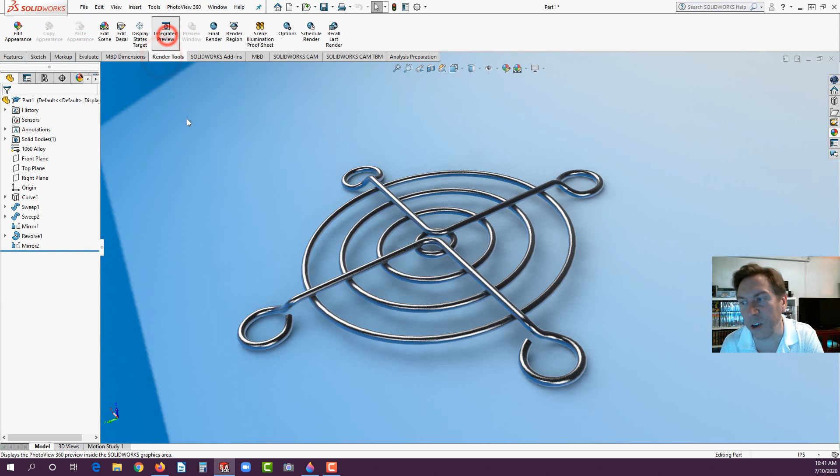Let's go ahead and get started. All right, now you can see with this model, you just turn off integrated preview here. But our strategy, and by the way, this is the rollback bar on the model tree here, I'm going to just drag this up. We're going to start off with developing the 3D curve from 2 sketches. And actually, I have perspective on, so let me turn off perspective. And let's go to front.

We're going to start by drawing the front profile that you see here, and then we're going to draw the right profile. That's going to be on the right plane that you see there, which has the bend on it. It's almost like it's the tool that you would bend the wire on to form it that we're developing. With just sketches, we don't have to make a solid or a surface or anything like that.

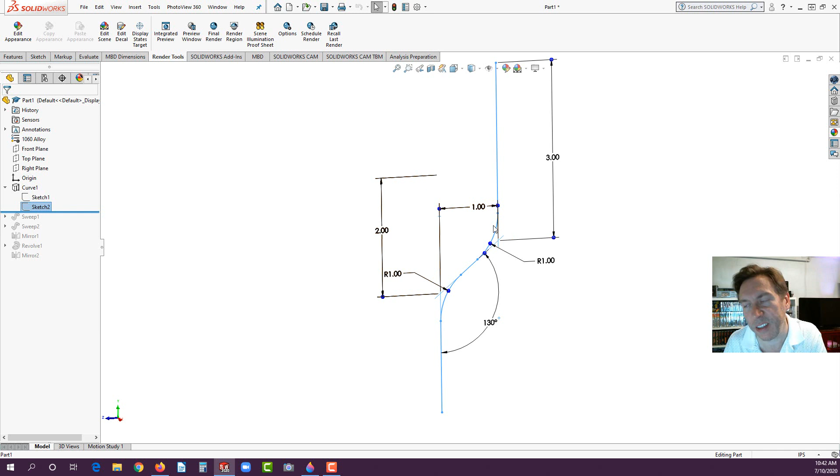And then we're going to use the curve tool to combine those to make that 3D curve that we'll use later for a sweep. You'll see we'll sweep that along, and then we'll end up with this. As you can see, the sketch contained in here is just a circle, and then it's swept along the actual guide curve that's internally there. You see that in orange right there.

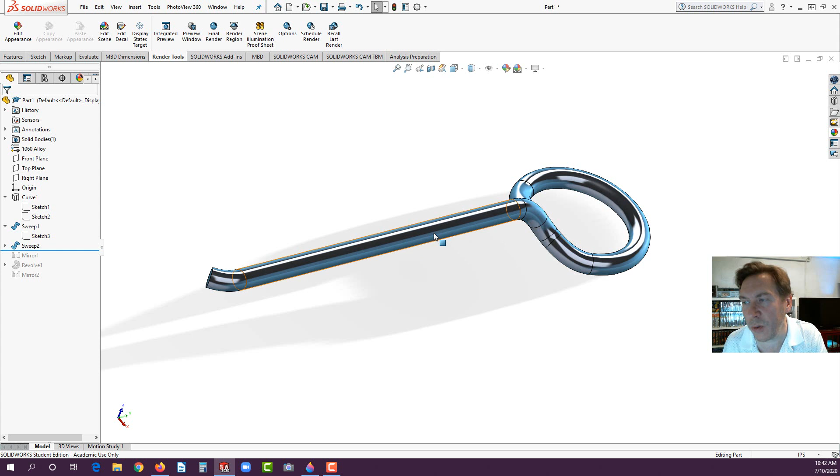Now the next sweep we're going to do is to extend it out. Some students have asked, why didn't you just do that all in one shot? We could have, but I like how we build it in a very small chunk that's more digestible. If you want, you could build this all in one shot, yes. But what we do is we extend that out, and then this sketch for this sweep is a little basic. It's 7 inches, and then we have this 45-degree hook. The reason for that, we're going to mirror it across, so 45 and 45 makes 90. So you end up with an elbow, 90 degrees, and it mirrored over the little wire on the other side there.

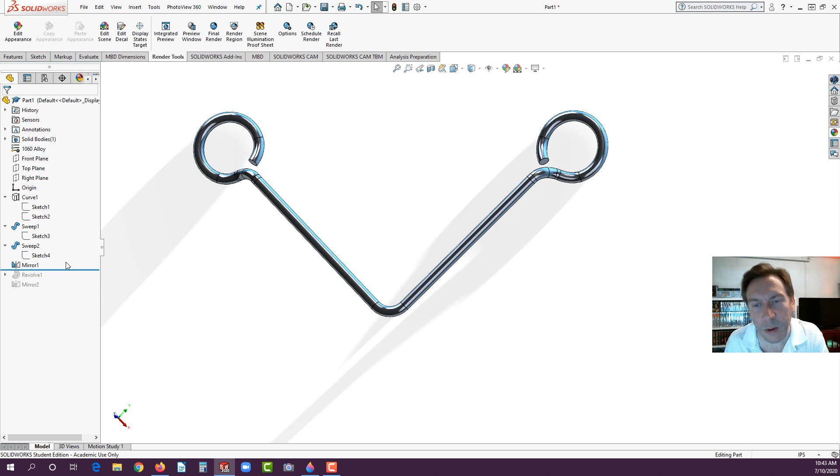Then we're going to use a revolve tool, and we're going to revolve this. Now, a lot of students that I used to have do this would revolve a full 360, and then they would go ahead and make a circular pattern. Rather than doing that, the strategy I used here, get rid of the pattern. You don't even need it.

What you do is you just revolve 135 degrees on one side and 45 degrees on the other, because right here is where the sketch is going to be contained for that. Here's the sketch with the multiple circles that are going to be revolved around the center right here. So 135 and 45 makes 180 degrees, which gives you exactly half. And then you just mirror it across, using one of those little flat ends of the revolve to mirror that. So that's the strategy we're going to look at today.

There's a dozen ways you could do this, this is just one method. So let's begin, start off with a new part file.

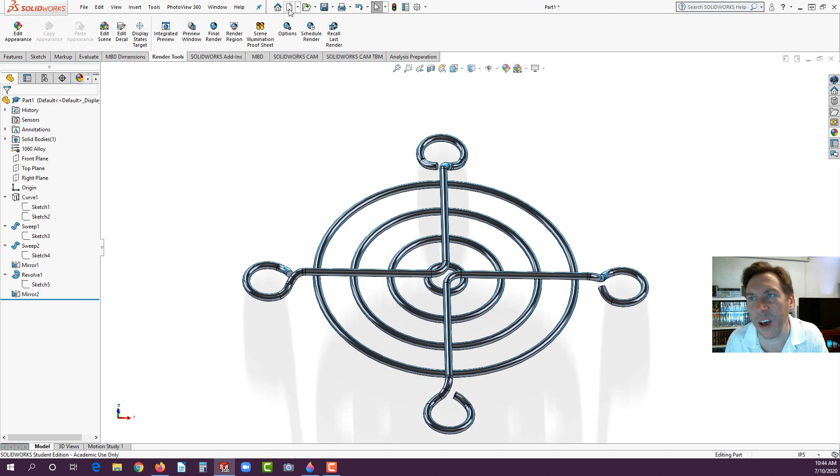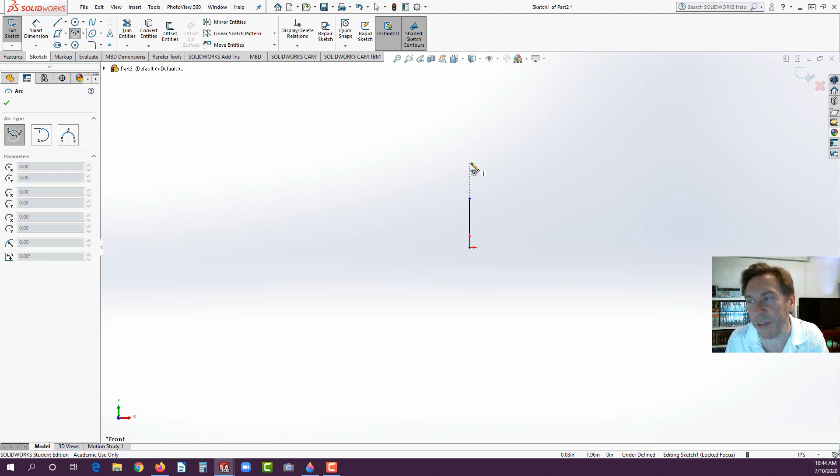Select the front plane, start a sketch, and go to the line tool, and right at the origin, drag up a vertical line about 1 inch. Then go over here to the center point arc tool. Hover above your line so you get the line of inference, maybe about a half or three quarters of an inch above it. You don't really have to measure it, we'll put dimensions in a moment.

Click, release the mouse button, and connect directly to the vertex of the line that you just drew a moment ago. Click again, rotate it counterclockwise around, and then get over to this side, and it should be about 300 to 330, around there. Again, we're just getting it close. Click and hit escape. Now what we need to do is align that center.

You could do that with drawing a center line from this point to this point, or we could use a relationship, and that's what I'm going to choose to do. So I'm going to hit the F key first to zoom up so you can see this. Now make sure you hit escape a couple times. Hold down the control key, don't let it go. Select this line, and then select the center point. Over on the left, you should see coincident.

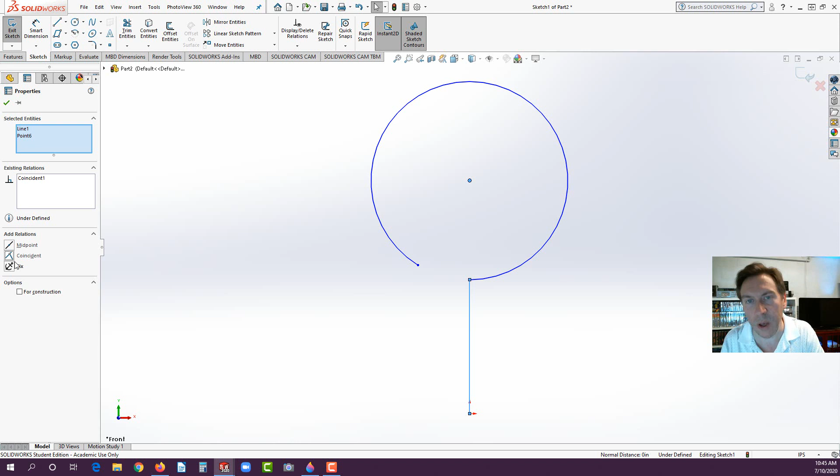Now, some people are thinking, well, shouldn't it be vertical? If we selected the endpoint, or the vertex down below, then yeah, but coincident looks at that line as if it's infinite, and it's just aligning itself to it. So we now have applied that relationship, so it can't sway left or right.

Now we could go to Smart Dimension, click on the bottom origin, and click on the center point of the arc, drag it to the right, click. This is going to be 4 inches. Click on this arc here, drag it up to the upper right, 1.5 inches.

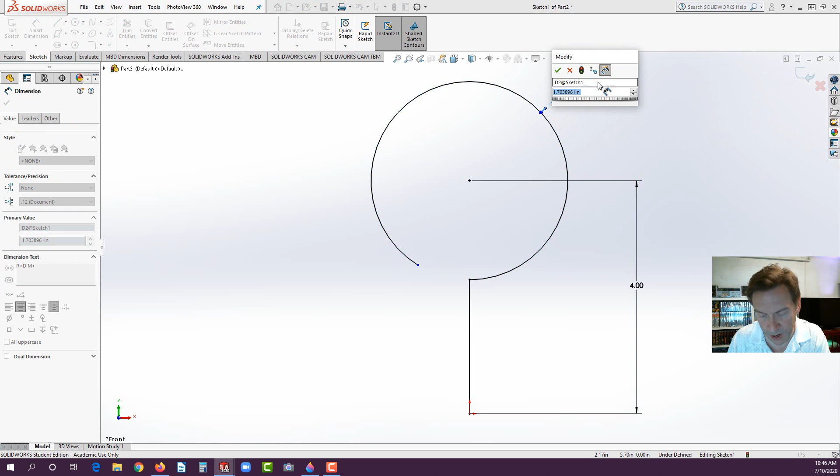Here's a little trick, those of you in class, if you remember this I'll be really impressed. We want to put in an angle for the opening here. The trick is 3 points, the only 3 points there: 1, 2, and then the center point. Click, that's 3. Drag it between the opening, click to release it, and type in 15 degrees.

So that's one method. Interesting, another method popped up that someone knew of, holding a key, I can't remember, but last time I did this lesson and posted it, someone said there's another method too. There's a very old way where you actually drew center lines and just dimension the center line. You could do that too, and a lot of my students find that actually easier sometimes than remembering these 3 points.

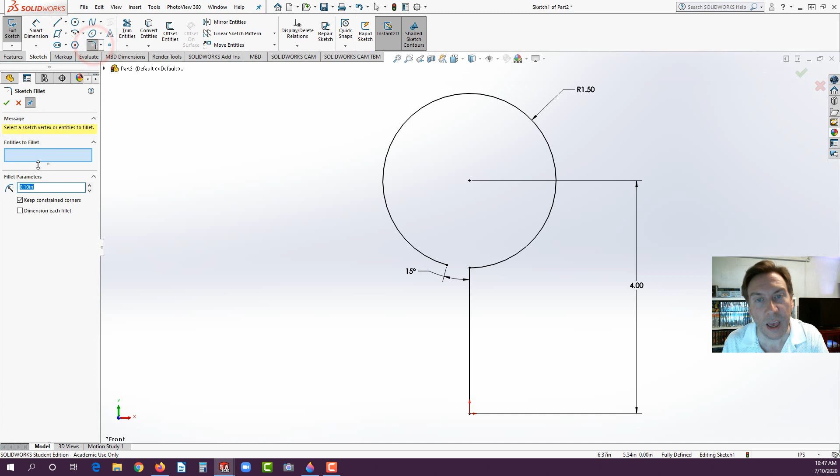Now that we have that, we need to put a bend in here at this corner. So go to sketch fillet, set this to 1 inch, and select this corner right here. Hit the green check, and there's the bend. All right, that's done. Hit rebuild or exit sketch, either one is fine, gets you out of it. It should turn gray, the dimensions disappear if you click on the screen, and you're in good shape.

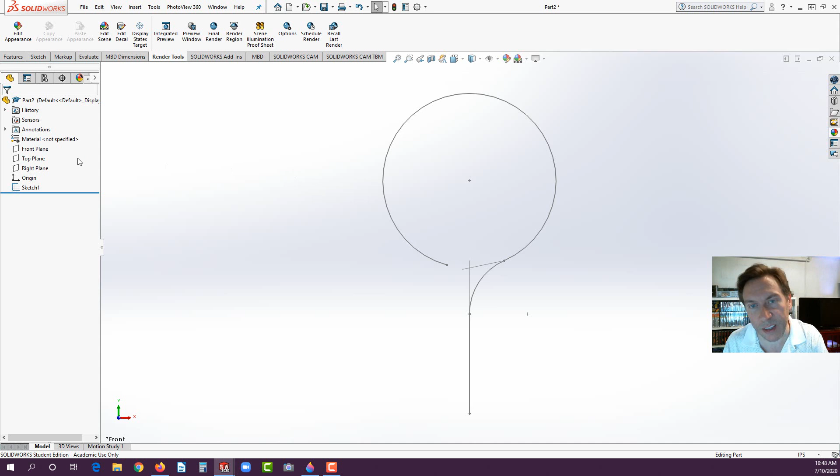Now we need to create a separate sketch that's perpendicular on the right plane for the bend that's going to take place. So select the right plane, start a sketch. You'll have to hit the space bar or use fast keys like Control 4 to go to the right view orientation. Take your line tool, get down at the bottom, click when you get the origin, the little orange circle, drag this up about 1.25 inches, almost 1.5 inches, make sure it's vertical, click. Drag off to the right a 1-inch line at around a 45-degree angle, click. Now drag a line straight up and try to match the line to the left of it so it's about the same height, click.

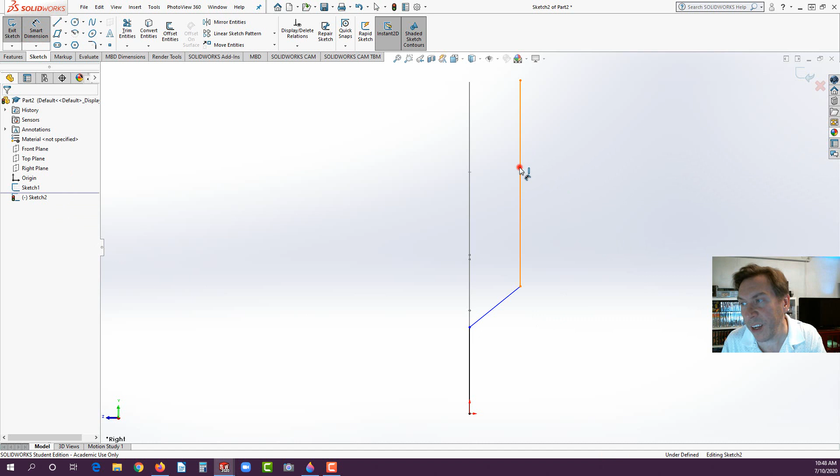Then hit escape. Let's go to Smart Dimension, dimension this line right here, click over here, and that's going to be 3. Now what we're going to do is that's eventually going to have a bend in it, and we might want to dimension this on a print. So it's a good idea to say, eventually this is going to be a theoretical sharp corner once the bend or fillet is put in.

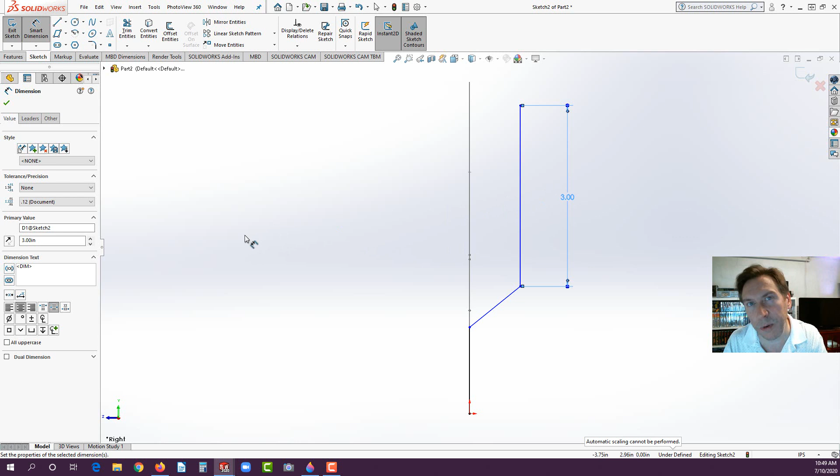And so that dimension, you want someone to be able to understand what it is. So over here on the left, where we have dim text or dimension text, click underneath there, hit enter, and type TSC, theoretical sharp corner. That's preemptive, so click on that.

All right, now let's go ahead and make sure Smart Dimension is on. Click on this angled line and then click on this vertical line on the left and get in between. That's going to be 130 degrees. Now click on this line here and drag it straight up. It's weird, the dimension doesn't center it on this one, so that's okay, and I know I've been touting, make sure your dimension centers. Once you put it in, it will. So go ahead and click right about there. That needs to be 1 inch.

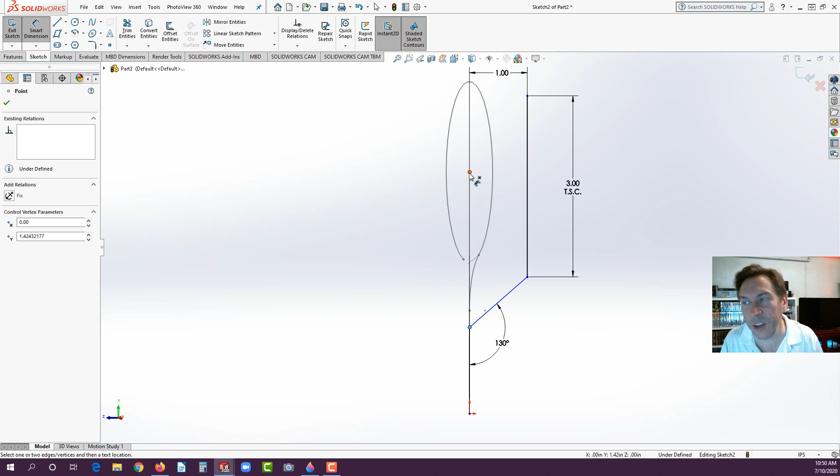You could drag that up like so. All right, there's one more dimension, and this one's the toughest one. The trick is click on this corner down below here, and now hit your left arrow key on your keyboard just one time, and you'll see now you're seeing the actual front view sketch, and you're just dimensioning to the center point of that. So click on that, drag it over here, center it, click, type in 2, and then over here again, hit enter TSC.

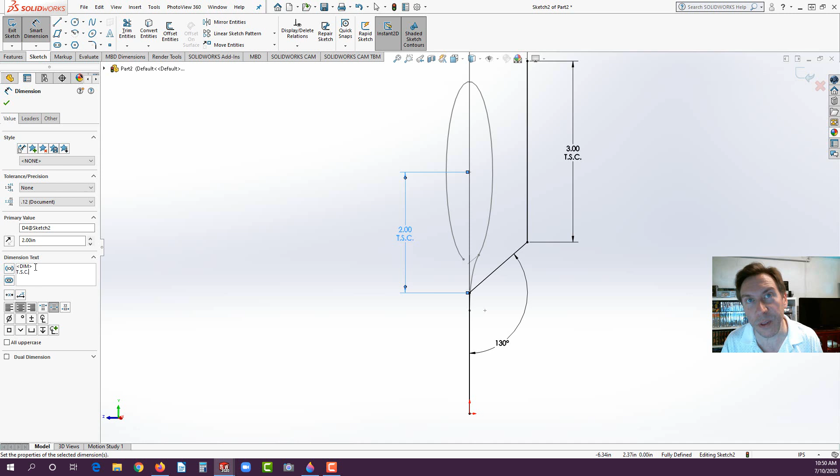Now, not all companies require you to do that. Where I came from, we used to have to do that just so someone would know. There are other methods too. I don't think that's an ANSI standard by any stretch of the imagination, but where I used to work, they wanted us to do it that way. So if you're not required to do it, don't worry about it.

All right, now we have those, we have our bent wire. Now we need to put the radiuses or fillets in it. So go to Sketch Fillet, and it should keep it at 1 inch. You could go ahead and select this one right here and this corner here and hit the green check. Now you'll notice since they were done at the same time, there's only one, and you should note that on the drawing so that someone knows that both are 1 inch.

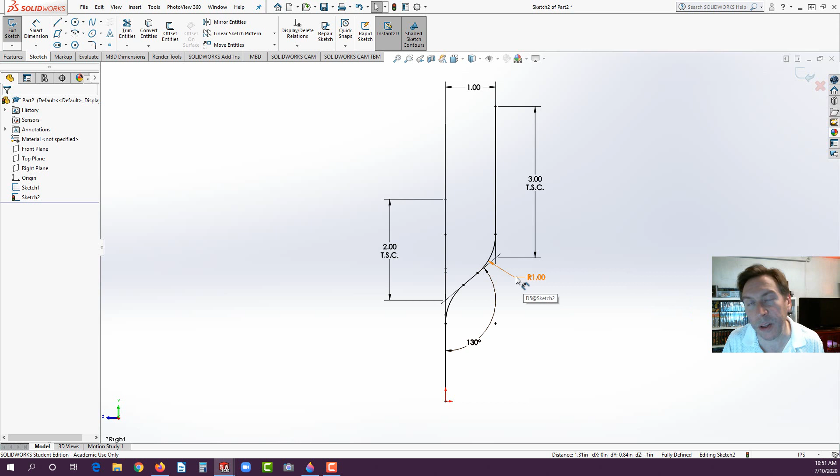Hit the green check mark there. Now click on, not on the actual number, but click on the extension line of the radius. Over to the left here, hit the little arrow to the right.

Now, the ANSI standard, you could put 2x or x2 for times 2. I like putting in 2 PLCS period for places. Where I used to work, we used to do it that way, but that is not an ANSI standard.

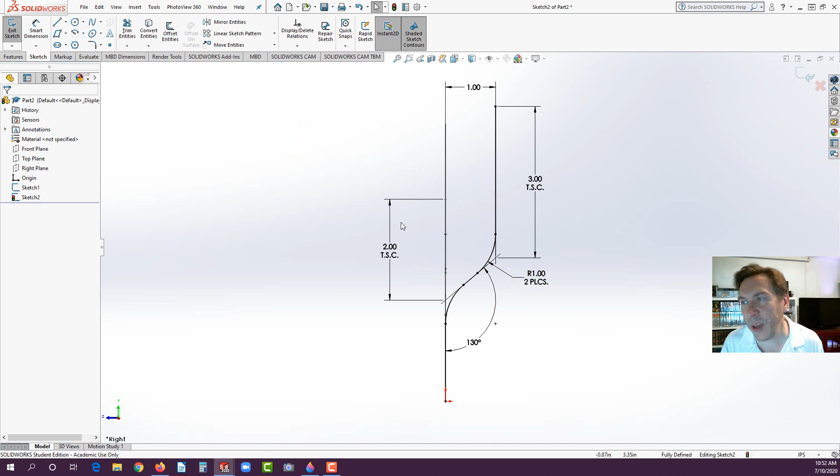Now that we have that done, go ahead and hit rebuild or exit sketch. Either one's fine. And if you rotate this around, you can see both sketches laying on top of each other.

Now we could go to insert at the top, go to curve. By the way, if you don't see insert, it's just because you don't have this tacked in. You have to hit this little arrow here, then insert and curve. But I'm going to tack mine in. I like to have that.

Insert, curve, projected. Notice you have sketch on the face or sketch on the sketch. That's one of the really neat things SolidWorks has. In some systems, you actually have to extrude the surface or some sort of model and then project it on top. SolidWorks cuts out that middleman. One shot, sketch on sketch.

Go ahead and select geometry from both. You can select this circle here and then maybe this line here, just as long as it's one or the other, or you could select it from the feature tree over here. You'd be able to go in and actually select both sketches. Hit the green check. Now click somewhere and you'll see the guide curve now.

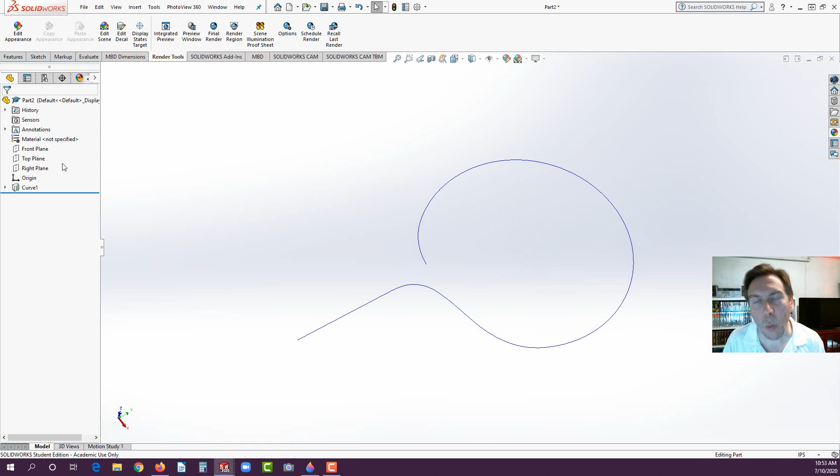All right, we're going to now draw a circle that's going to sweep along there to make this. Let's select the top plane, start a sketch, go to the circle tool, and you might have to rotate this so that you could see clearly the origin. If you're looking at it from a side view, it might be very difficult to lock it in. So rotate or just go to the top view orientation.

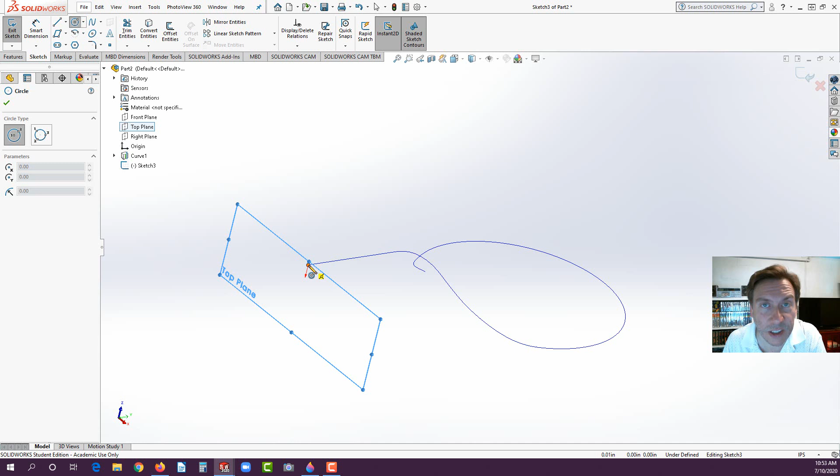Once I get this orange dot, I'm going to click and drag this out. I'm going to go to Smart Dimension, and it's 0.5. Now you're probably thinking, wow, 0.5, that's pretty big. It is. This is a big grill compared to what this is. I didn't want to go and measure all this, so I just scaled it very large with simple dimensions that are easy to remember, so I don't always have to look at the training guide.

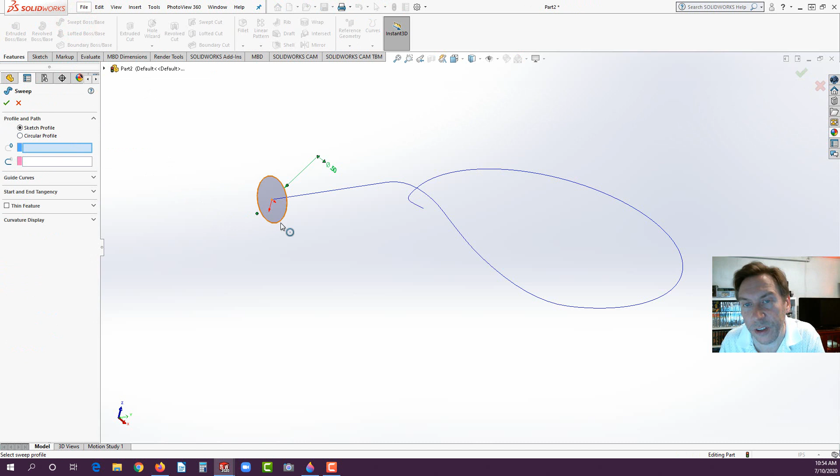Select the circle, and then select the blue guide curve. And you'll see it sweep along, giving you a preview. Hit the green check.

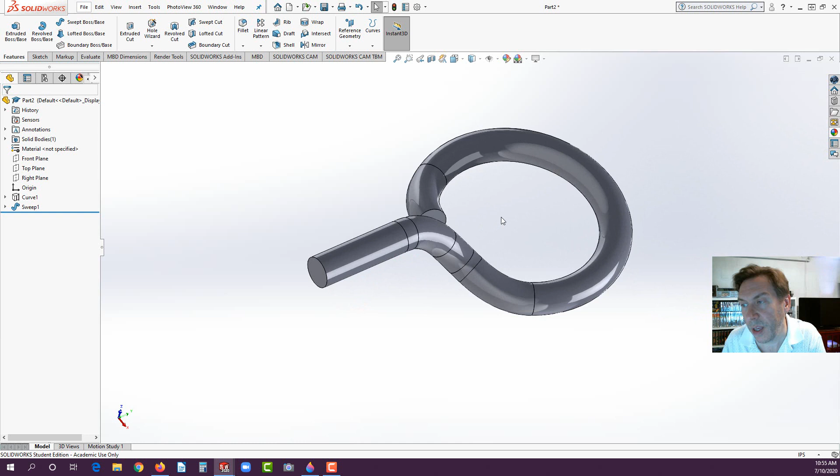Now, for some reason, the curve still stays on. So click on that and click on the little eyeball to hide it. Now, if you accidentally selected the solid model and hit it, you have to go over here, click, and then click on the eyeball to unhide it.

All right, let's go ahead and select the front plane, start a sketch. The hard part is done. Let's go to the front view orientation, go to the line tool, click on here, drag this straight down. It's about 7 inches. Now, here's a little trick I'm going to show you.

You notice with the line chain, you could continue on, but we need a tangent arc that's going to hook only about 45 degrees down, and it's going to be about 1 inch for the radius. Actually, a half inch for the radius. So here's a little trick.

Rather than going all the way up to the top and finding the tangent arc tool, this is kind of neat. And if I were to hire someone and if I saw them do this, I would be applauding, because this is one of those little shortcuts. Might not seem like a lot, but it shows the level of knowledge that a person has of the software. Technical expertise is what employers are looking for.

Now, hover over that point just for a second.

Now, don't click, just drag it down and to the left, and you should get a tangent arc. It automatically started that for you. There's a lot of little tricks like that built into the software. I'm not going to show you every single one of them, there's so many, but that's just one example.

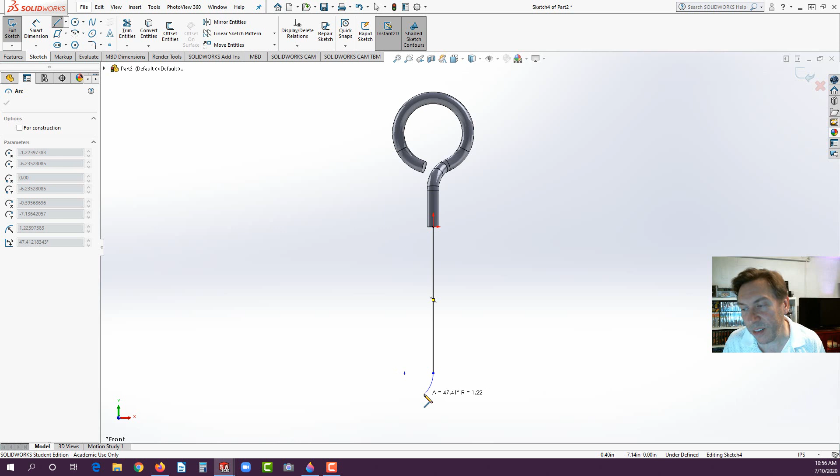Now, A should be equal to about 45-ish, and then the radius, just get it close to 1. That's fine. Click, and make sure it hooks to the left a little bit. Hit Escape. Now let's go to Smart Dimension and dimension that at 1 inch.

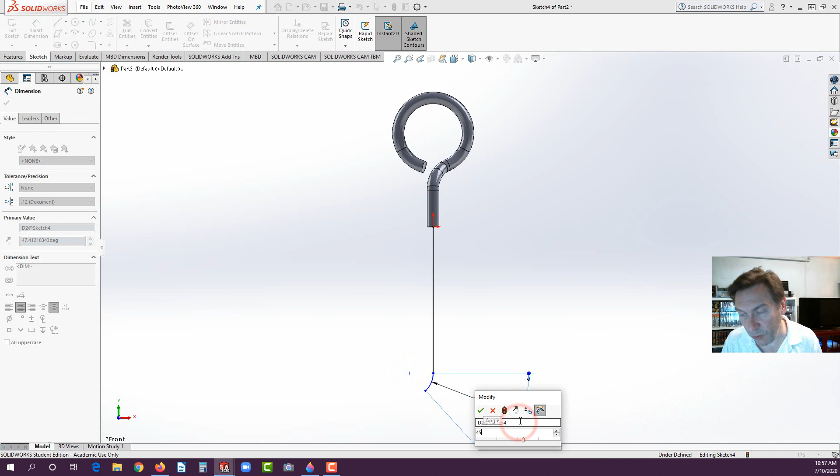Remember the 3-point arc: click 1, 2, and on the center. Drag that to the lower right here. That's going to be 45 degrees. And finally, click on this line and make that 7.

Up until a few years ago, SolidWorks forced you to use a tool called Convert Entities up here. It didn't really force us, it was just that there weren't the options and enhancements that there are now. I still like to show it because I don't use it as much, since they've done things like what you're about to see here. Convert Entities is kind of like Offset Entities, but at a zero offset. It allows you to select edges and entities and project them onto any surface, and you can use those, tied back to where you selected the original projection from. It's a very good tool to know about.

So I'm kind of sad that I can't fully show it to you right here. I could show it, we could select that edge of the circle and project it so we could sweep it. In earlier versions, those of you with a version that goes back a couple years still have to do it that way, so go back and watch one of my videos from the past for exercise 7 here. However, a couple years ago, SolidWorks, always updating things, which is awesome, it's really great that they do, eliminated the need for this.

So watch this. Let's go now to Features, Swept Boss Base. The first thing it's looking for, look at that little picture, is the profile. It's actually a circle, go ahead and select that edge, and we could reuse it. Now the next thing it's looking for is the path. Select the 7-inch line, and you'll see it sweep along.

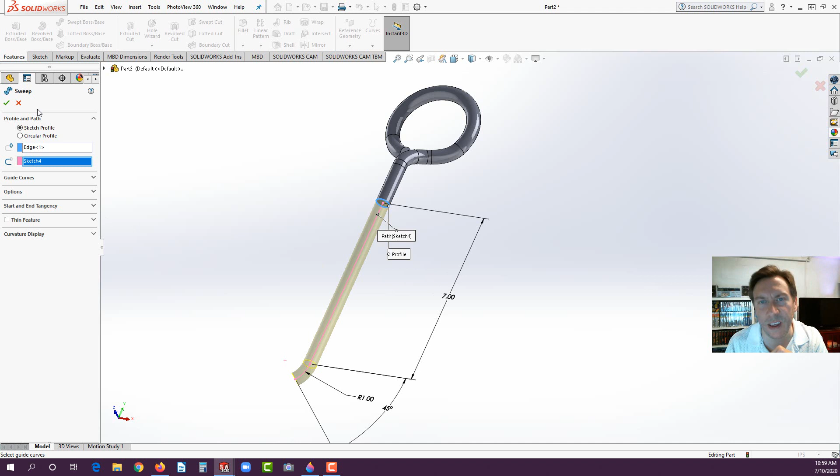Hit the green check. All right, now we could go ahead and just mirror this across. So go to the Mirror tool up here, and the face to mirror across will just be that little end face right there. Now make sure over here, this is very important, I'll repeat it, you don't want features or faces.

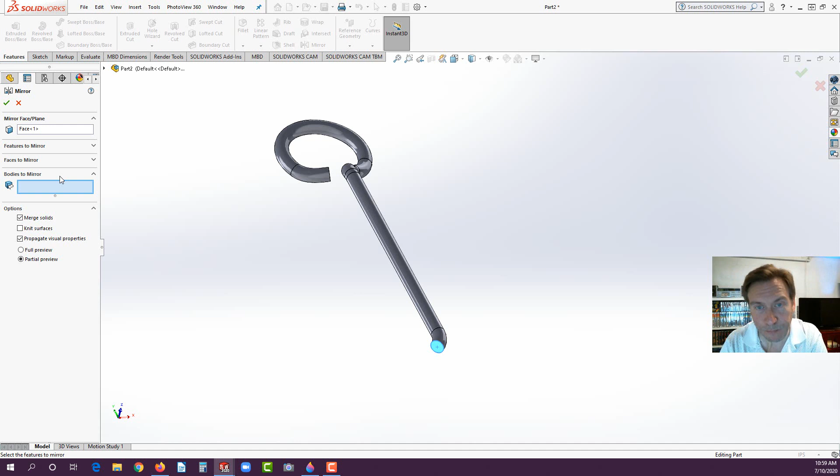You could do it, but remember there are a couple features here. The easiest would be to use Bodies to Mirror, and we're going to use Bodies to Mirror later as well, rather than selecting individual features. Saves time. So select Bodies to Mirror, select anywhere on the body, and it's basically going to mirror everything across. Now here you can see the preview, it just gives you the topology, so it's not actually giving you the edges, but trust it, it's working. Hit the green check, and there we go, we have our 90-degree elbow.

Let's move along here. Select the right plane, start a sketch, hit your space bar, go to the right view orientation, and the first thing I want you to do is get out your centerline tool. Select centerline, zoom down here, and infer to this edge.

Now it's interesting, the first time I did this earlier today when I was practicing, this didn't highlight the center point this easily, so sometimes it's difficult. But what I did find is I just moved to the center and it found the center automatically. So sometimes things, maybe the graphics, who knows, could have had an effect on that. As long as you can see that center cross with the circle around it, you're in good shape.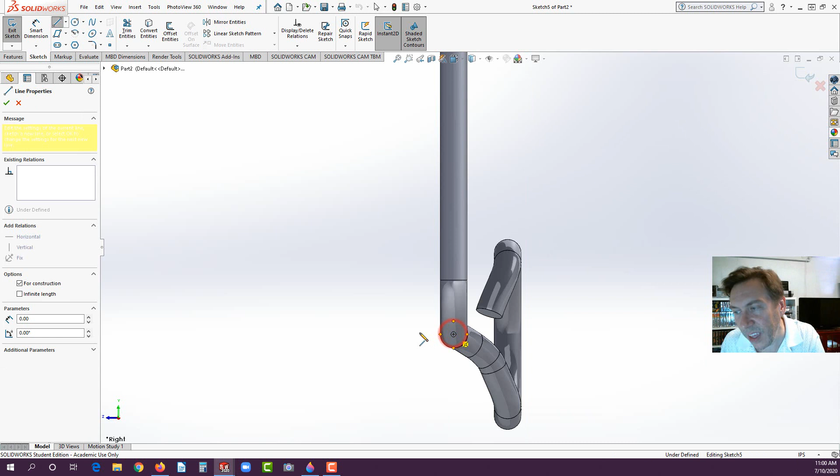Click and drag that to the left about 1.5 inches, and then hit escape.

You've just now located what will be the center, right here. It's the intersection, the theoretical sharp corner. And then once we revolve around that and mirror across, we're done.

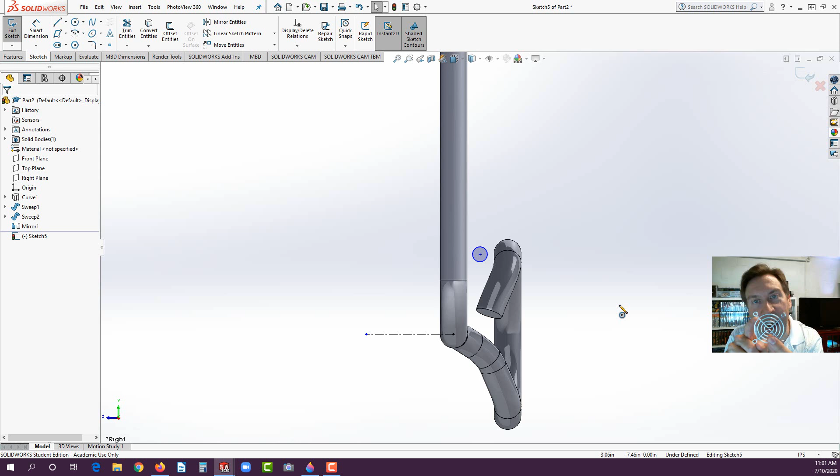Now take the circle tool and draw a little tiny circle right in here, just like that, and hit escape. You could go and dimension that at half inch, but the rest of the wire is consistent throughout. There's no size difference, so what I'd recommend is tying the wire for the rings to the wire we used for the elbow.

Here's how: make sure you hit escape a couple times, select this circle down here when you see the orange circle appear, release it, then hold Control and select the circle you just drew. Go over to the left here and make them equal. Now, if the design ever changes to change the wire, all of it updates.

From here, we're going to dimension. Go to Smart Dimension, select this, select the circle, and then select this edge. Drag this off to the right, click to drop it, and we want to make that 0.245. You might think, well, it's a half inch diameter - why are you making it a little shorter?

The reason is this: now, if you want this to be a true assembly, you'd just have the welds that occur in between here, however it's welded on there, that's fine. You could make these all separate. When you revolve them, it will actually not merge the bodies.

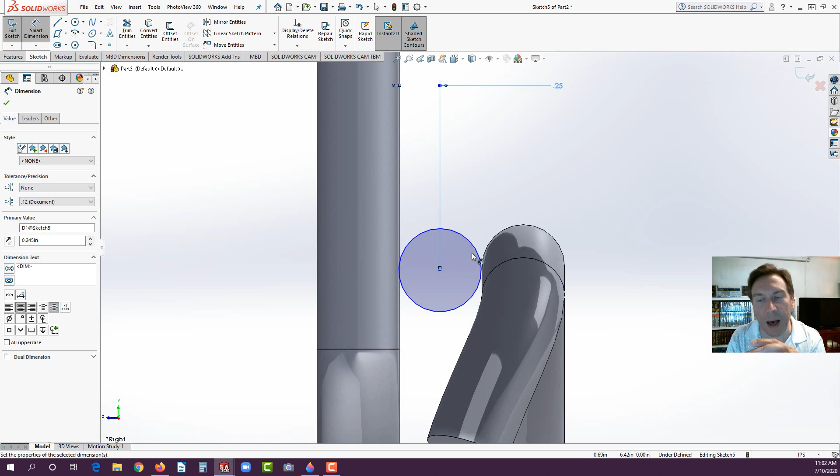And that's fine. I like to merge them a little bit, so I'm dipping it in about 5 thousandths of an inch of an intersection. And if you zoom up, sure enough, you can see that little intersection. This will negate having multiple bodies - it will actually make everything one body, which might be good for 3D printing. Not that you're going to 3D print this necessarily, but in other applications, if you want them all merged, it works really well. Even though 3D printing would typically, that coincident, will glue them together automatically. But anyhow, let's move through this.

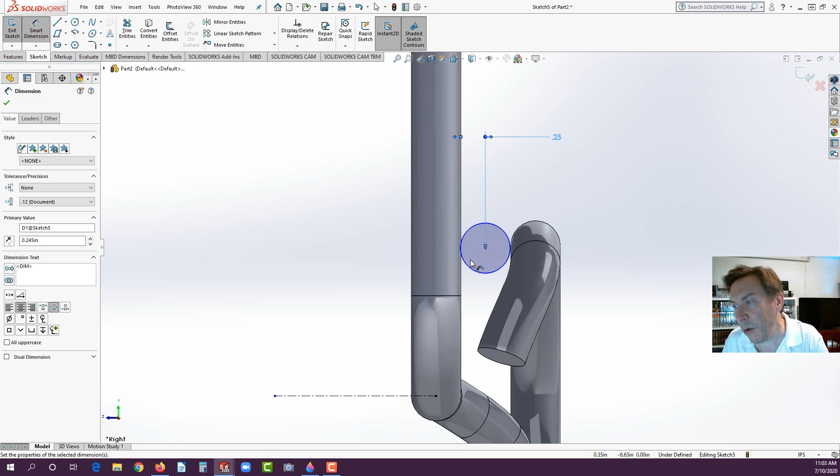Now let's go ahead and select the center point of that circle again and select your center line. Drag this down here below the center line - you could drag it up, either one is fine. Click to drop it, and let's make that 2.5. And that's the diameter, so if you want, you can put the diameter symbol in. So we know that the center, if we were to measure the center of the concentric ring, it's 2.5 inches. And then every single ring is going to be offset 2.5 inches from each one.

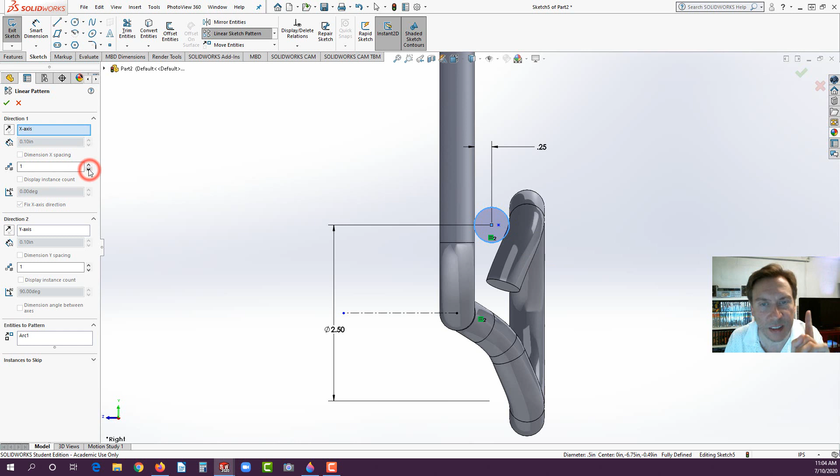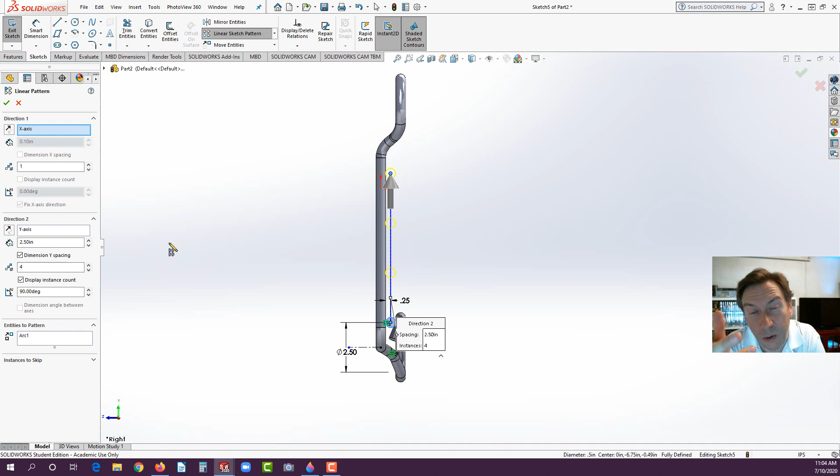So now you can hit escape, click on this circle, and now we're going to use linear sketch pattern. Be aware, the x-axis we should set to 1 instance only. Go down to direction 2, which is the y-axis, and increase that to 4. Now set the spacing to 2.5. If you zoom out, you can see it goes all the way up to the top, almost there. Now, one last thing: dimension the Y spacing just so it locks it in. If you don't dimension Y spacing, then it could adjust, or you could put in a dimension later on. But dimension Y spacing - great tool.

Hit the green check, now let's go ahead and hit escape. Select that 2.5, that's the center line that you drew, because we're going to spin around it. Go to Features and Revolve Boss Base. Now remember, the first one is going to be 135, and then you're going to have to hit this checkbox, direction 2, and that's going to be 45.

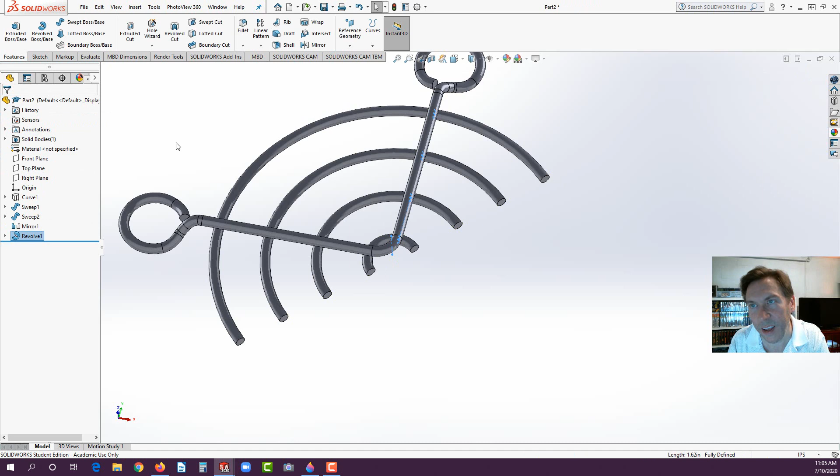Hit Enter. Now, it may be coming out reversed, like here, I'll show you. If you flip this little arrow, it might look like that. Most likely you're getting what I'm getting, which is this right here, full 180 degrees of the concentric rings, and that's what we want. Make sure you got that. Hit the green check, and now we just go to mirror.

The mirror face, you just select one of these little end faces, it doesn't matter which one. And then go to bodies to mirror again. Select anywhere on the surface, hit the green check, and you're done.

Okay, so that finishes the exercise. Now we're going to take a look at the 3D Sketcher. It's a very nice tool, great for making tubing, wiring, an exhaust system. It's a lot different than the strategy we saw before.

Let's go to File, New. By the way, feel free to save this first as E7 for your portfolio. Now go to File, New. For this one, I don't have it in the actual training guide. This is something I've added, and I haven't added a chapter for it, but this will be one of the labs. Let's go to Part, hit OK.

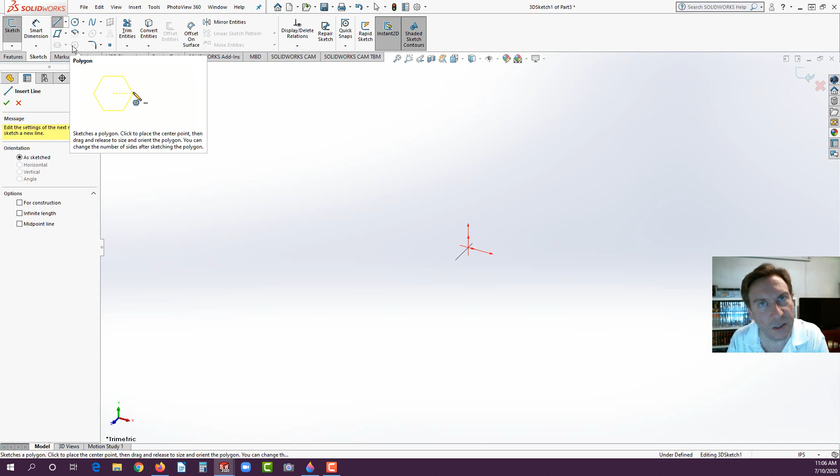Instead of starting to sketch on a plane, we hit the little arrow here and go to 3D Sketch. Now take your line tool. Notice that some of the geometry is not available in the 3D Sketch. Over the years they've added a couple new options here and there and enhanced it. They're always working on it, so it's quite a good tool.

Let's move our pointer to the origin. Click. Now we could drag straight down. Let's say we're making the back of the chair first, or at least one side, and then we're going to bring it forward, down, around. So I'm going to bring this down 2 inches. This is going to be a small chair, so approximately 2 inches right there.

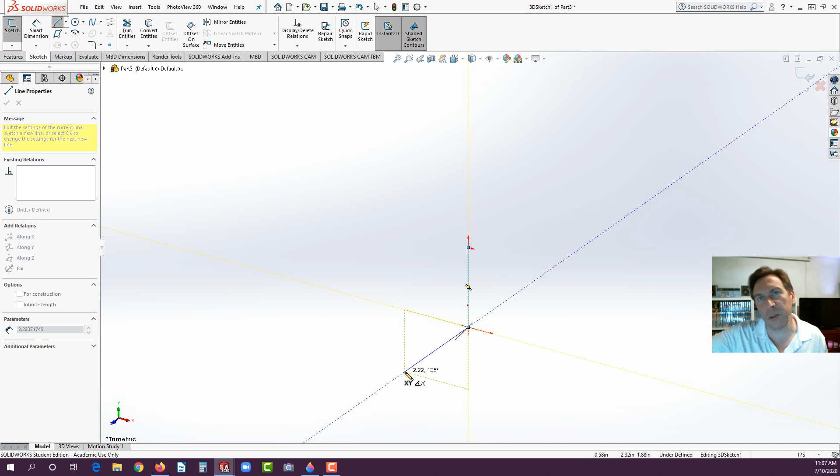Click. Now I want to have it come forward, because what we just drew is the side profile of the back of the chair. Now we need to have it go out for the seat. So here's the trick, and if you remember this, the 3D Sketcher is pretty easy: the Tab key, just hit one time, and it will flip it so it's now in the YZ. It's actually going in the Z direction.

So bring that up about 2 inches. Again, get it as close as you can, doesn't have to be perfect. Click. Now I'm going to zoom out a little bit and go straight down. I don't need to hit the Tab key just yet because I'm still able to go straight down 2 inches. And all these lines, by the way, will be 2 inches.

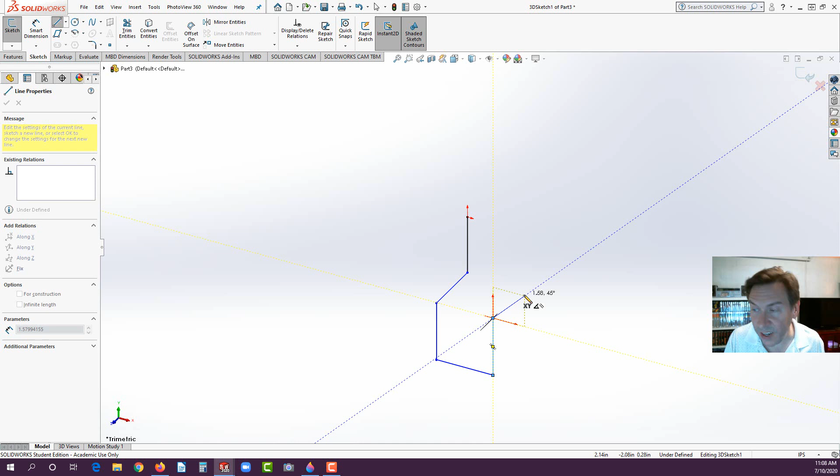Click. Now drag it across to the right. Again we have to hit the Tab key, so that changes it to ZX, so it could go across to the right. Make sure that's about 2 inches. Click. Now we want to drag it up, so hit the Tab key again, 2 inches. Click, and we want to drag it back. Hit the Tab key again, 2 inches, and notice, follow the lines of inference for horizontal and vertical.

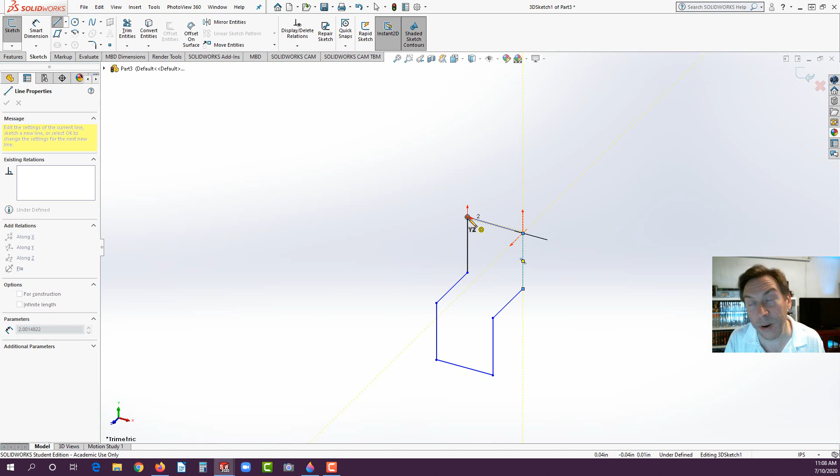Click. Now we want to drag it up, and we're able to drag it up, so we don't really need to do much there, 2 inches. Click. And now you don't have to hit the Tab key if you're going to tag the origin again, it will go across by default. Click, hit Escape. I could have drawn the underside too, but I think you'll get the idea here.

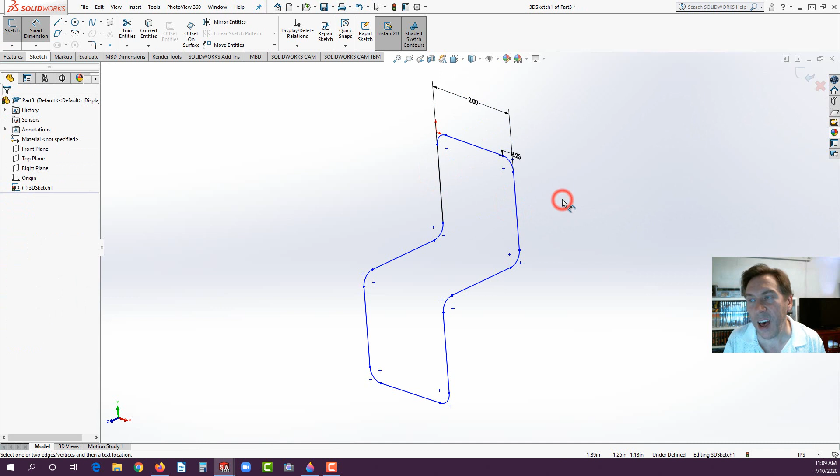Now that we have this drawn out like such, we could go ahead and put some fillets on here. So go to Sketch Fillet, set them to 0.25, and select the corners. Hit the green check. If you rotate it, you could go to Smart Dimension and dimension these things, and put in exact values. You can spend the time if you want to make it look really nice. Like I said, I don't have a written lesson for this, so it's up to you how you want to proceed.

Okay, so now we want to sweep along one of those entities. Since we no longer have a plane that's easily accessible, I'm going to show you a new way to create a plane. We're going to select the right plane, you see it right there on the side, and we're going to select, holding Control, a point.

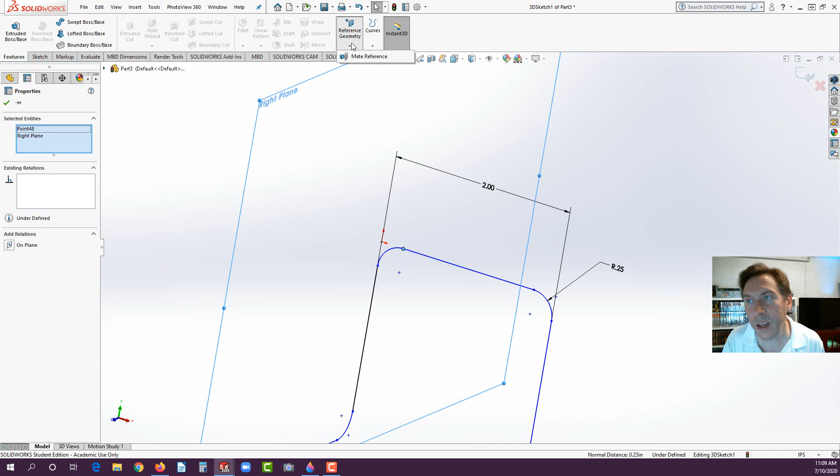Now we could go over here to Features, Reference Geometry. Actually, let's hit Rebuild first. We want to exit that sketch. Sorry, hit Rebuild. Now you could go to Reference Geometry, Plane. What we're going to do, hit the little arrow next to the part, select the right plane, and then select that point. It will offset a plane parallel to that point.

So that's another method, that's 3 methods we've seen so far since we started this class. Last week we learned about on a curve, perpendicular to a curve, and the week before that we learned about offset at a specific value. Now we can see another method here. Hit the green check.

Now that you have that, click on that and start a sketch. Go to your circle tool, and at that origin, click and drag out a small circle. Yep, mine snapped, that's good. And let's dimension the diameter of that circle to, we'll just make it 0.125.

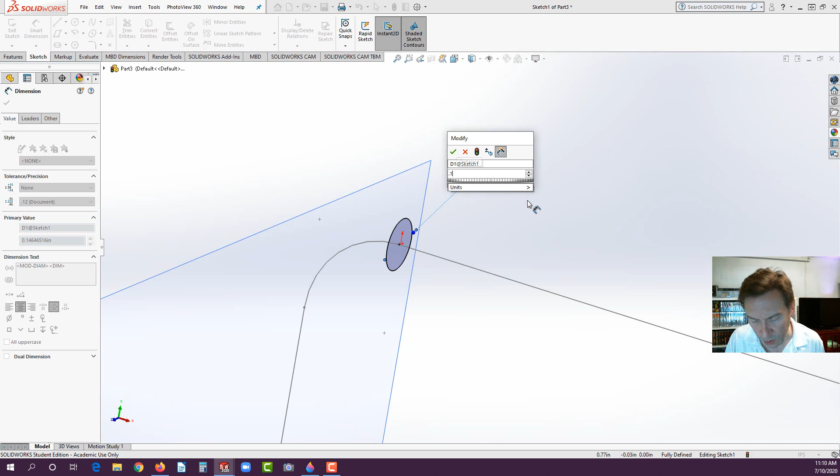You don't want to make it too big because the fillets are only a quarter inch. If you make it too big, they'll intersect.

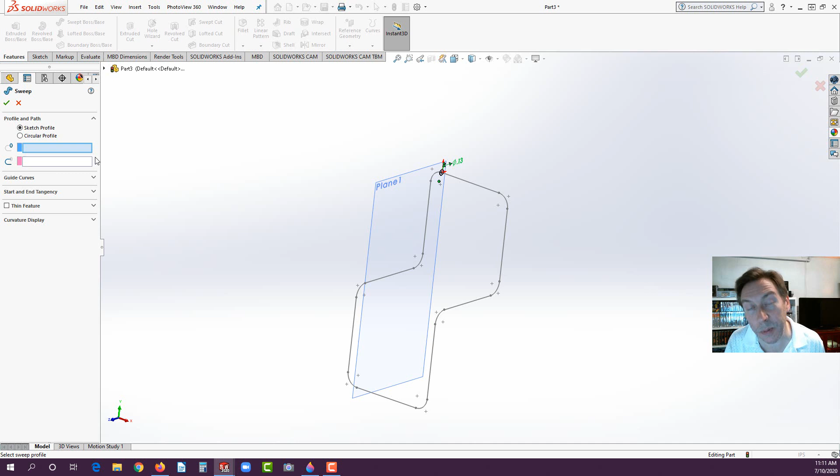Now we could go to Features, Swept Boss Base. And by the way, if it's supposed to be hollow, you could draw another smaller circle, like maybe 0.1 on the inside, and it will sweep and make it hollowed out. Select the circle and select the guide, hit the green check, and we could click on this plane to hide it.

And now that's how you use the 3D sketch tool. So if anyone could tell me what the key on the keyboard is to flip the axes, I'll give you a second. Think about it. 1, 2, 3. The tab key. Just remember the tab key and you'll be in good shape. It's a pretty easy tool.

So moving along here, as far as the training guide goes, the lab for today is this smoke detector.

So I'm going to rotate this counterclockwise. I downloaded it already, so remember, if you download it, once it's downloaded, you click on it, you could open it and use the rotate tool. When you're inside Chrome, I haven't found a rotate tool yet that's accessible without downloading it first.

Okay, so here we have what's a smoke detector. We see a diameter, it's actually a thickness of 0.25 with a 0.1 thickness of that. We do have, let's see here, 2.5 inches for the diameter of the actual unit. We got a chamfer on here, there's some little details for that. The chamfer is 0.1 by 45 degrees.

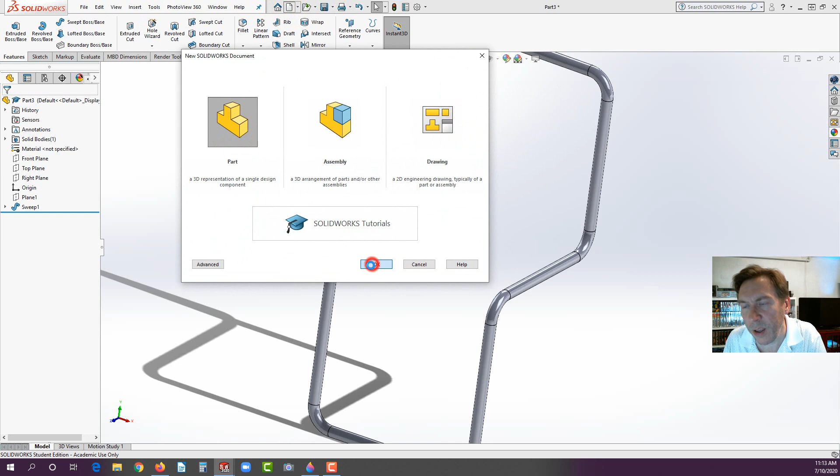So go to New, Part, and hit OK. And remember, this is where you might want to pause because I recommend you draw these on your own. These aren't terribly hard, but they're good practice. Just like doing puzzles all the time, you're going to get very good at them. So if you want to be a very strong modeler, try them on your own. And then if you get stuck, use the actual labs.

Be aware I might not use all of the dimensions that are shown on there because I'm going through it very, very quickly. Also those little mistakes in dimensions that I plug in, whatever comes to mind, I could gauge when I grade your labs if you're relying too heavily on the actual videos versus trying to do them on your own.

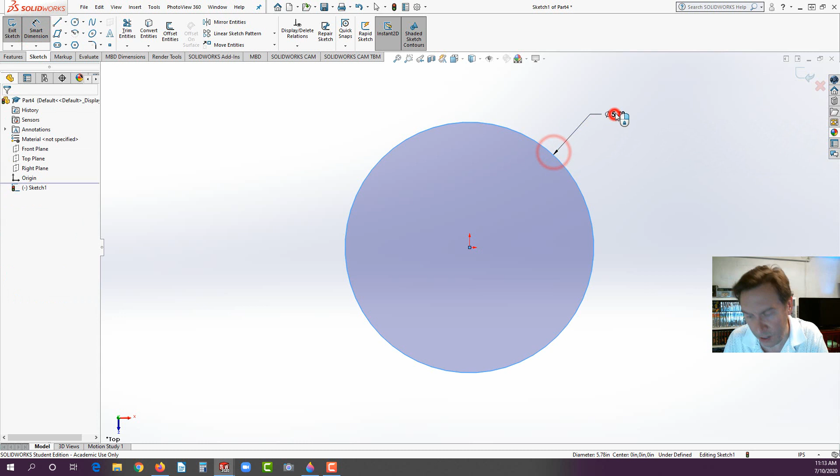So anyhow, I'm going to go ahead and select the top plane, start sketch, and draw out the diameter of 2.5 inches. I'm going to go to Features, Extrude Boss Base, 0.25.

We'll go ahead and put the chamfer on immediately. So underneath Fillet, go to Chamfer, and the chamfer was 0.1 by 45 degrees. Select that edge, hit the green check.

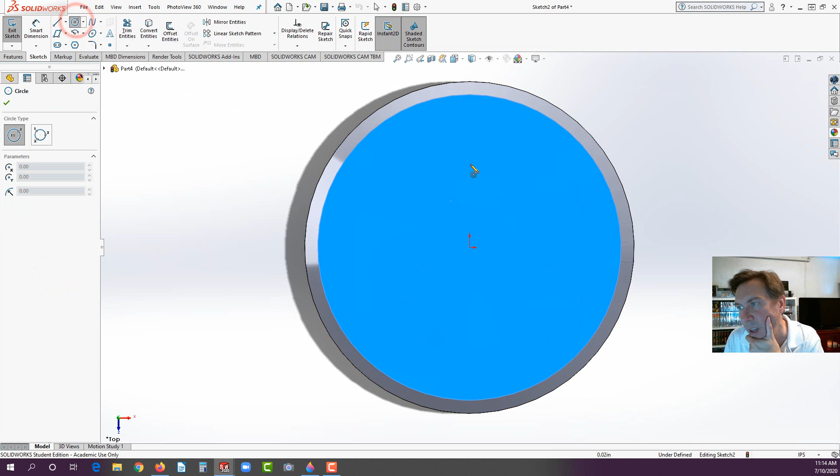Now we're going to go ahead and select this face, start a sketch, and I'm going to go to the top view. Let's take a look at that drawing here. We could see this is centered, and the diameter is 0.75. So let's go ahead and get that aligned, draw that out, and dimension it at 0.75.

And now you could draw a center line from here to here to lock it down, or hold Control and select both centers and make them vertical, the lines. And now we need to put a dimension in, and that's 0.625 to centers.

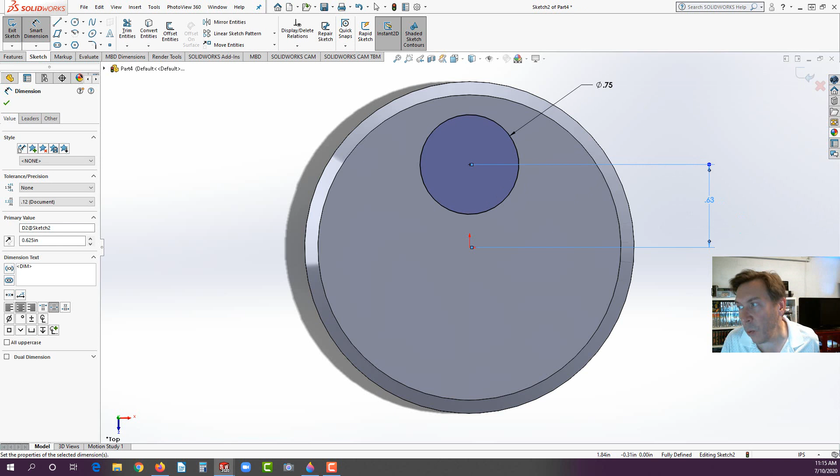So smart dimension from here to here, 0.625. And be aware, every once in a while on the drawings, I'm not perfect. There might not be a dimension, or there might be a dimension missing.

In the old days, as I call it, when I first learned, I learned how to do things on the drafting board, believe it or not. Computers were just coming out. Essentially you would actually take a scale, and they call it, you might have heard the term scale or ruler, they call it a scale for a reason because you can actually scale sizes. So whenever you see a drawing, you'd be able to calculate the scale, like, oh, that's four times that, or whatever, to get the actual amount.

So you could go in and actually look at those dimensions and try to measure them with a ruler or scale and figure out what they are. That's fine with me. There are a few that I know I've had people relay back to me, oh, you're missing this dimension. I'm like, well, just put in what you think fits best. That's very common, I've almost never seen a perfect drawing. So just be aware when you're working with drawings, there's so many little details that can be missed.

So anyhow, let's go and extrude this. Go to Features, Extrude Boss Base. From here, let's see what we're supposed to make that. It's 0.1 for the height.

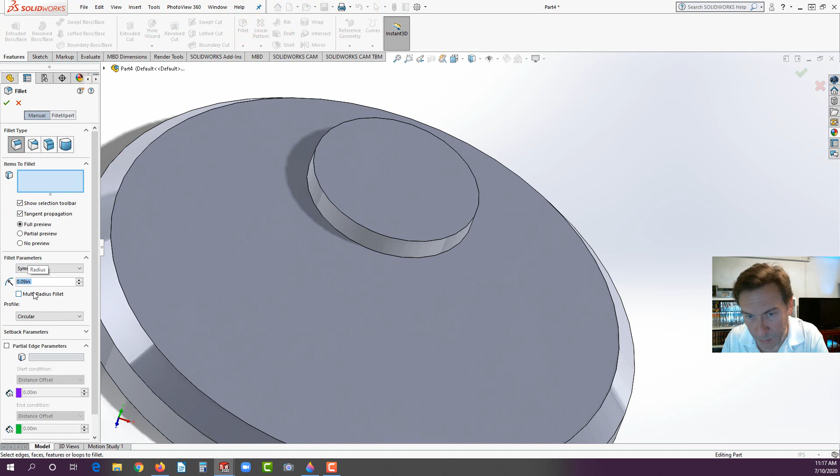Now I'm going to add a fillet. Let's see what that fillet is called out as on the drawing. Oh, 0.09. Select that edge, hit the green check.

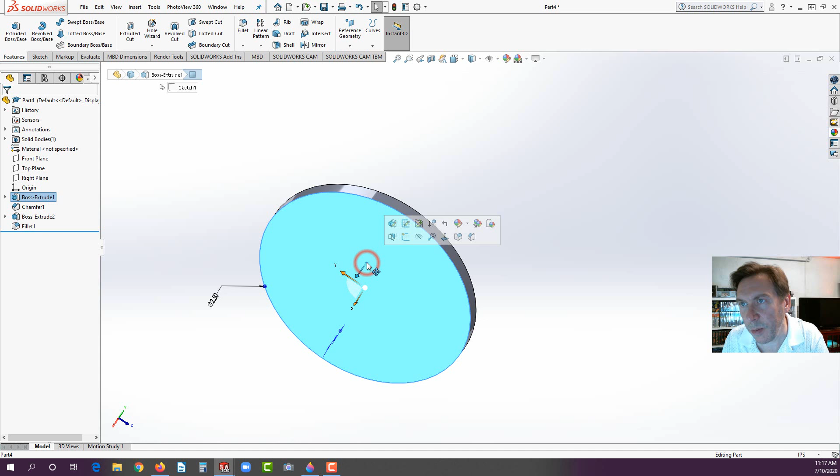There are a couple of patterns on here we want to chisel out, but some of those we'll handle after it's been shelled. So I think we're ready to shell. Yeah, we're ready to shell it. Flip it around, select the back face. It's not a bad idea to look for the typical wall thickness, which is 50 thousandths.

So we go to shell, 0.05, hit the green check. There it is. Now there's a little lip here, so select this face and start a sketch.

You could draw the diameter, but I actually have an offset on there for a reason, because I want to show you how to use the offset entities tool. So go to offset entities, and the offset I believe is 0.02, and then it gets reversed. Let's just verify that with the drawing. You can see that over here. So it's actually 30 thousandths.

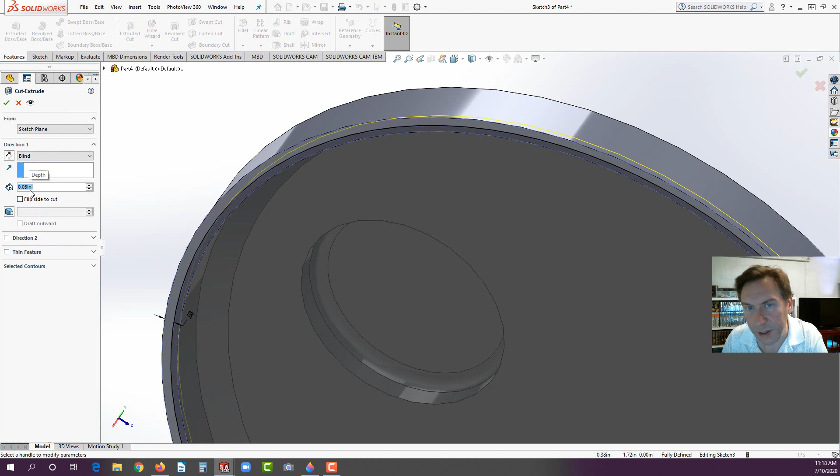0.03, hit the green check, and that depth goes 0.05, so right there. Go to Features, Extruded Cut, 0.05, hit the green check. All right, so we have that little lip there now.

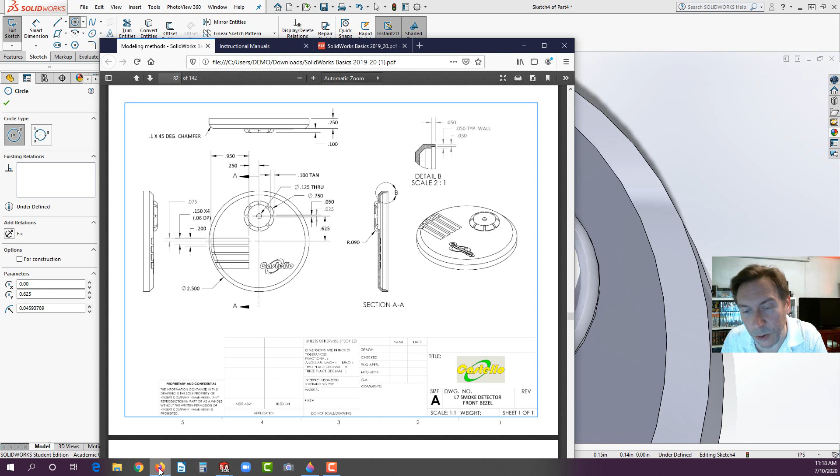There's also a hole in the center here. Select this face, start a sketch. You could draw the through hole in, that's an easy one, and the dimension for that. Now you can see if you have dual screens how nice it is to be able to put this on the second screen instead of always having to go over. Okay, that's 0.125.

And through all. So Features, Extrude Cut, through all. Let's put in those features.

Now select this face, start a sketch, go to top view, and let's look at the details that we have. We have the cutout starting over here on the right, because it's dimensioned here. Not that you couldn't start somewhere else, but we're looking at a 0.05 centered dimension. See, 0.025 is indicating the center of it. So 0.05 by 0.1, which if it's a square would be tangent to the outside edge.

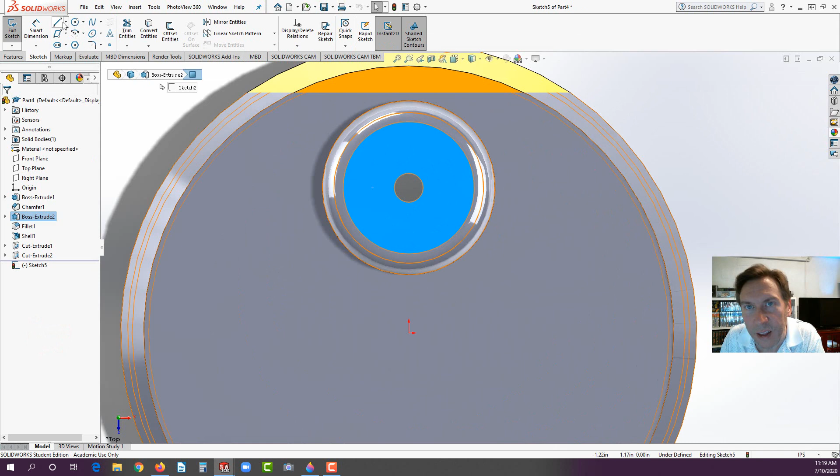So here's how to make that. Let's go ahead and put a center line in there, not that you have to do this step. Now we'll use the center rectangle, right about there, and let's bring it out a little bit like that. We'll dimension this: this is supposed to be 0.1.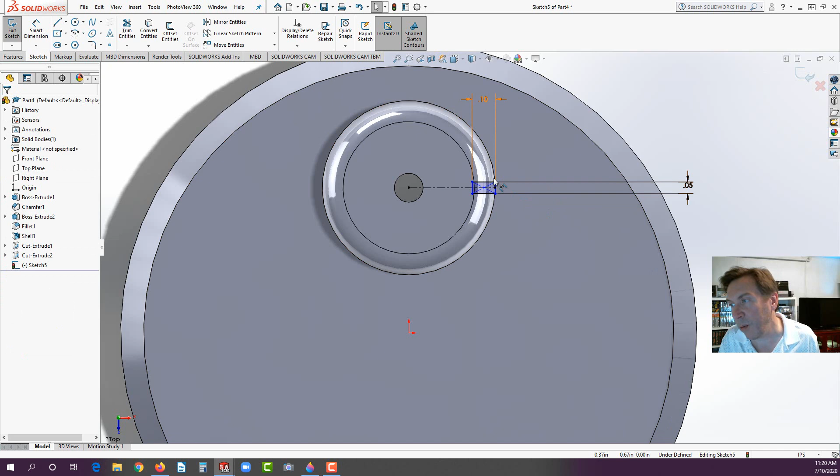And this is supposed to be 0.05. And what I was talking about, where it says tangent: hit escape, select this line, and make it tangent to this arc right here. Got to get that orange edge and tangent.

Now, here's something to call out. You'll sometimes see radiuses on the models look faceted, kind of like a diamond. That's just graphical, the graphics card setting you could adjust. Actually, not really the graphics card, it's just the graphics inside SolidWorks. You could set that up if you go to the gear here, and then to performance. There it is, and right down here is image quality.

Click on that. Now here's the resolution, and look at this, you could drag it. Now if you drag it really low, it's faceted. Remember, if you have an assembly with thousands of parts and you want to rotate it, like if you're doing a demonstration with a very large assembly, set it low.

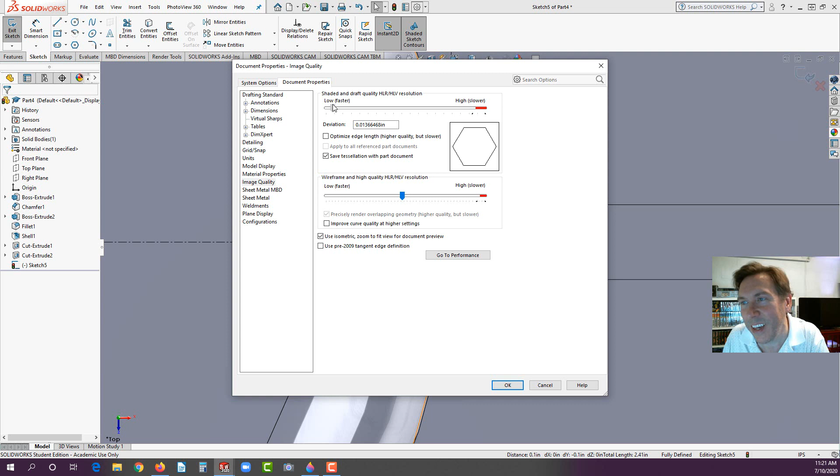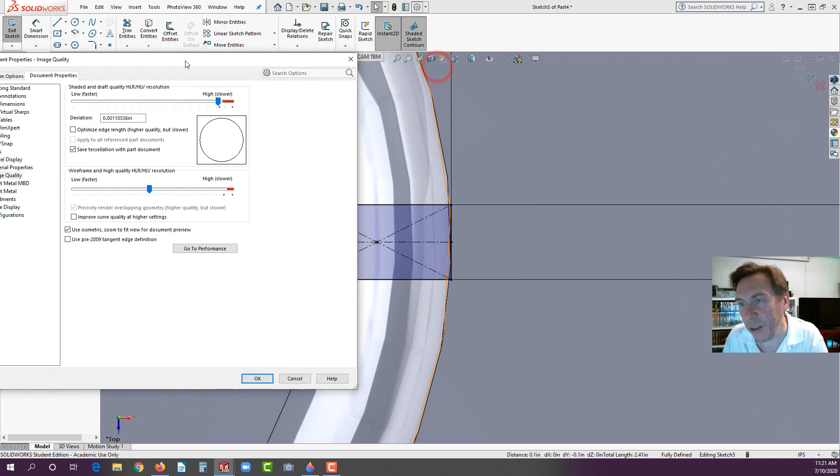Anyway, let's go ahead and hit OK. Watch how the resolution here, I'll move this out of the way so you can see it. The resolution hopefully will sharpen a little bit. Hit OK, and there, it's not perfect. You can still see some facets, but we're zoomed up on a very small part. Okay, so we've made that tangent, and now go to Features, Extrude Cut.

And this cut only goes up to a surface, and it's this surface right here. Hit the green check, and it gives us that interesting little feature.

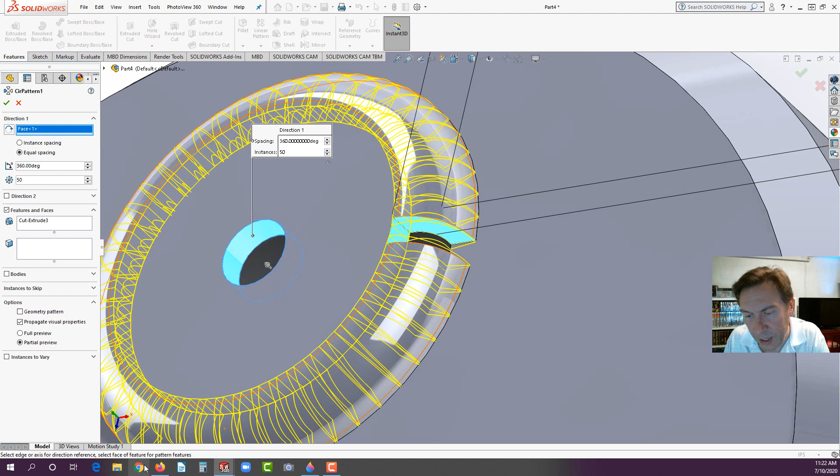So select this side face. Now we're going to pattern it. Go to circular pattern, and now for the direction, you can select this inner ring here, and let's see how many we need. 1, 2, 3, 4, 5, 6, 8. So just reduce this to 8. Hit the green check, and there it is.

All right, now we need to make those cutouts. Now this is actually really easy, but a lot of students think it's harder than it has to be.

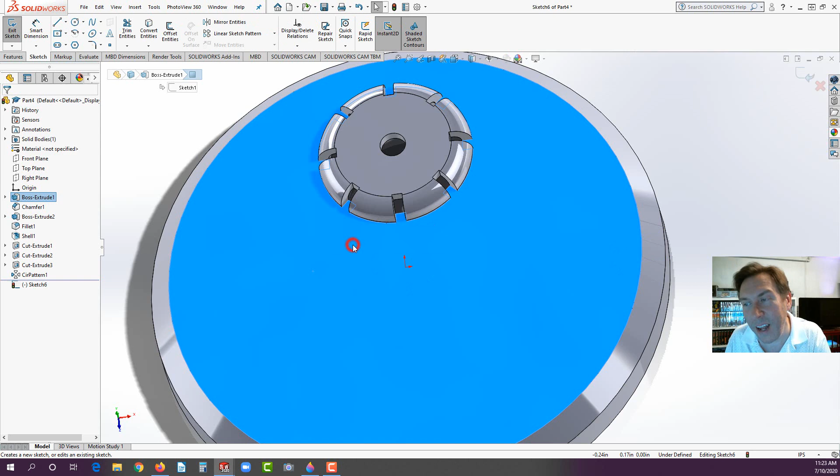Select this face, start a sketch. We'll go to the top there. Now take we could do a center rectangle. And I believe the first one aligns. And you can have it stick out a little bit like that. That's fine. And let's see what we have to do on the drawing here.

So that first one's centered, which is good. We already have that. It's 0.2 in width. And I do give you a 0.95 for a distance, which you could use if you want. Oh, and then it's offset 0.25 from there.

So let's put those dimensions in. So from here to here. 0.25, and then this 0.2. We'll actually just make this 1 inch. I have like 0.95. It's unnecessary, actually. You'll see what it's going to do in a moment.

And we could use the center line like we did before to lock in this to ensure that it's horizontal. So make sure that's horizontal. There we go. And it turns black, so it's fully defined. We could have control selected those 2 points as well.

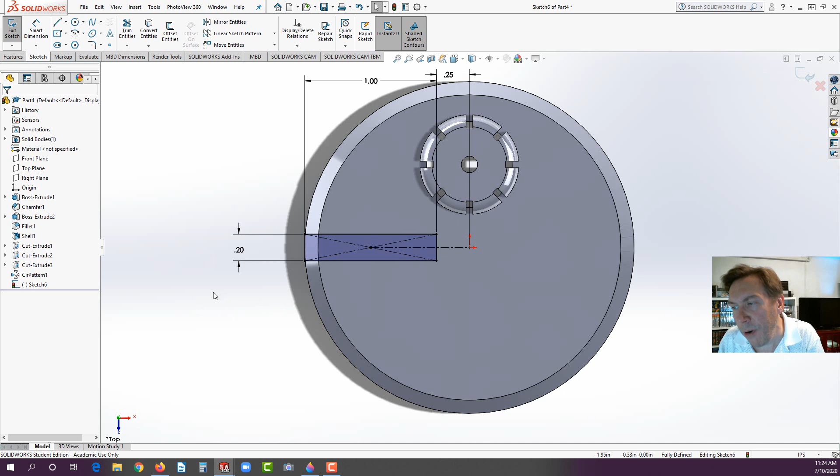It's up to you. All right, now we just go to Features, Extrude Cut. And we'll cut that first one in there. So let's look at the depth. The depth of that cut. Oh, I actually have it here in parentheses, 0.06 dp. dp means depth.

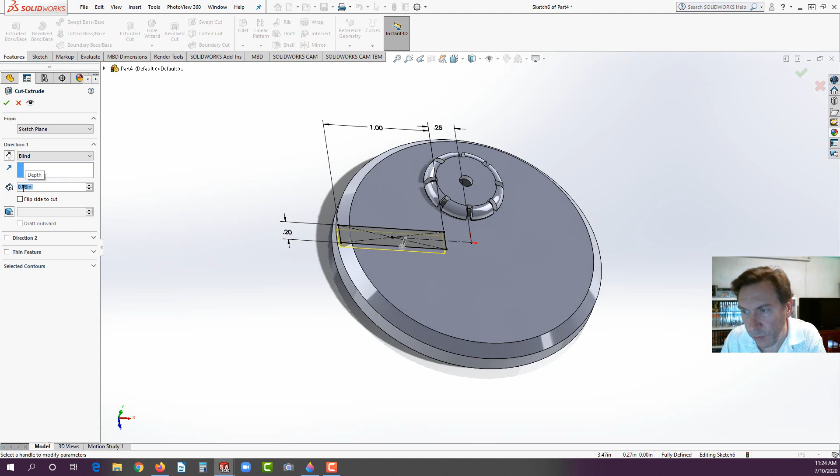Now notice it makes that radius automatically, and that's where students are challenged. They don't realize it's automatic as long as you just extend it out.

Now we just need to pattern that, so we select the feature, and these are spread out 0.15 by 45. Let's see, is that 0.15? Oh, actually 0.2. I have it too wide. So my mistake. So this is 0.15.

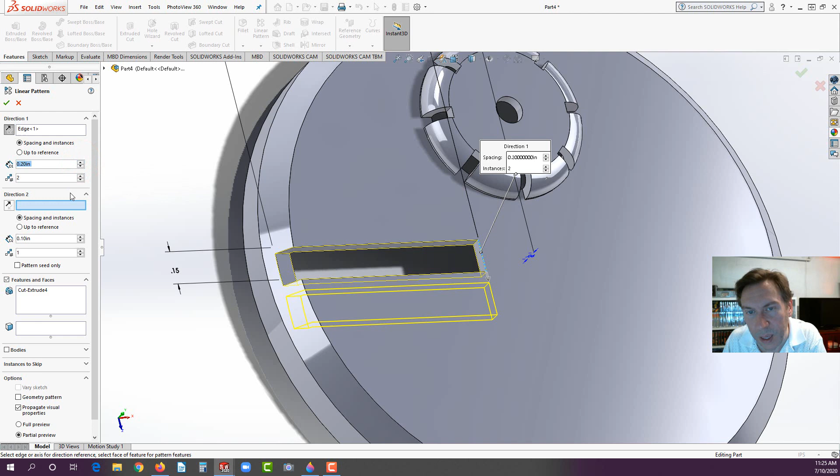All right, now we could select that, rebuild it actually just to be on the safe side. And we could go to linear pattern. And for the linear pattern, the direction, select this edge because it's a straight edge. And increase that to 0.2. And then increase the number to 4.

Now look at this. See that little feature? It's extending out. Again, students have a tendency to panic a little bit there, but watch what it does. It actually creates that interesting feature, which looks like it was a lot harder than it really was to create.

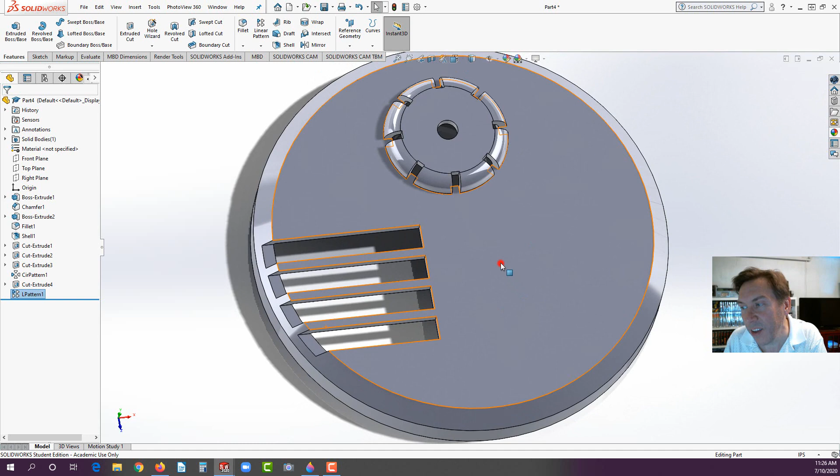Okay, now for the text. Select this face here, start a sketch, go to the top. You could use a center line here for the text. And what did I put down there? I have Castello. You can put whatever you want.

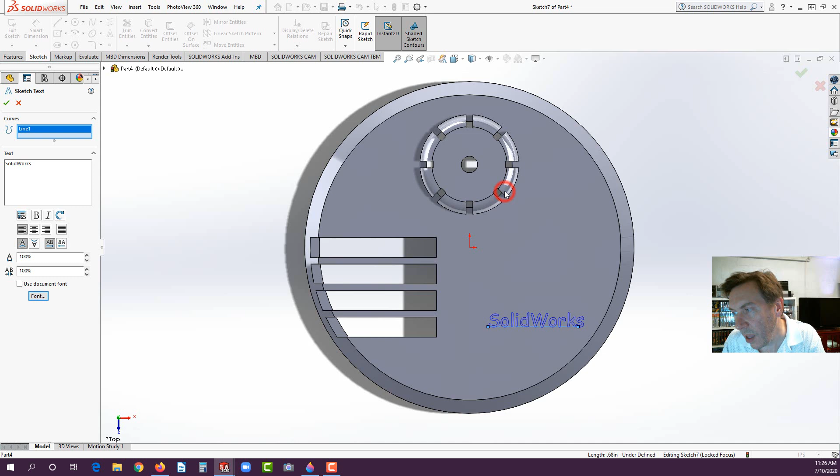Go to the text tool, select the line, SolidWorks. And I'm going to go ahead and change that font and go with something maybe a little smaller, maybe 0.1. And then I'm going to go with, I'll try Comic Sans. There we go. I'm going to go ahead and hit the green check, Features, Extrude Boss. I'm going to make this 0.03 for the height.

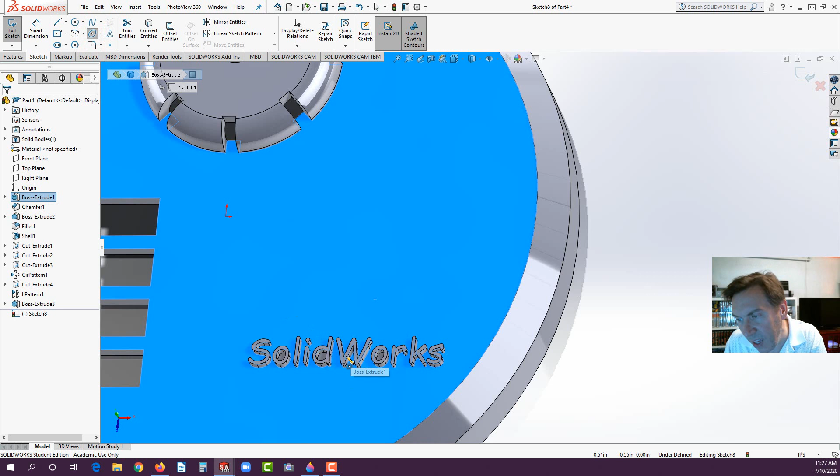All right, now I'm going to do a little trick here, start a sketch. Not much of a trick. And we'll look at the ellipse tool. Click on ellipse and kind of center this around here. Click, drag out, and see it makes that ellipse.

Now let's go ahead and get that center again. Follow it a little bit wider and then thinner on this end here. So make something that looks like that.

And go to Features and Extrude Boss Base. Instead of 0.03, we'll have just go 0.02, so it goes a little bit below it to give it kind of an interesting looking logo there. Or lame, whatever. It doesn't look that great. And you can just have fun with that, put whatever you want, put your name on it.

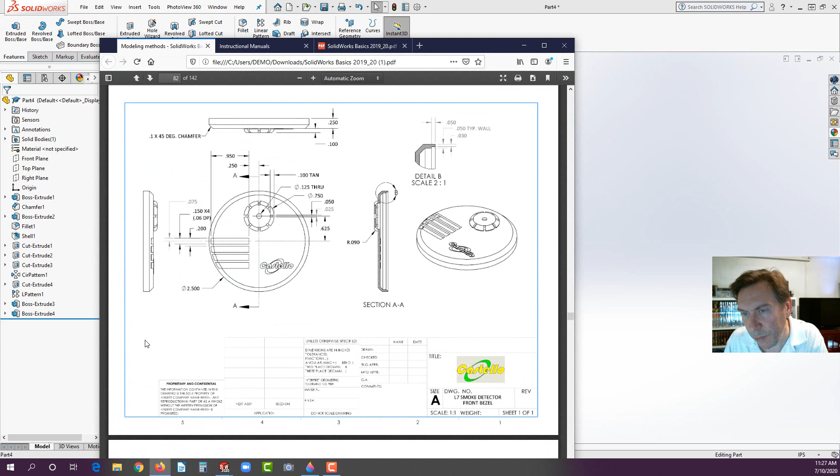And I believe that finishes that off. Yeah, looks like we got everything. And that concludes exercise in Lab 7.